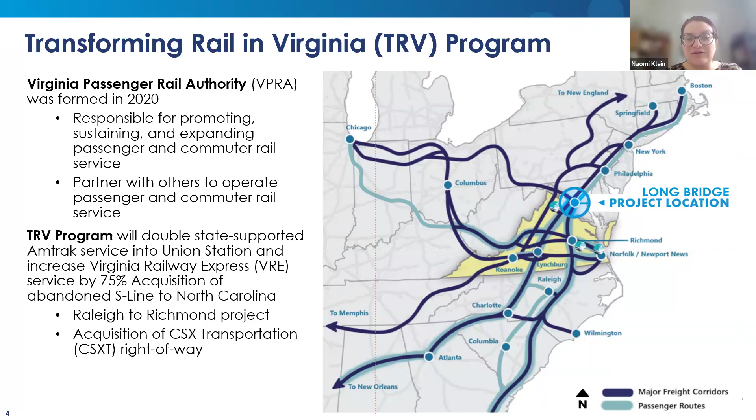As you can see in DC, it really is this midpoint that connects the north with the south, the East Coast with central cities, like you can see here, Chicago. And so it's not just about DC to Richmond, it really is about bridging the East Coast and being able to expand that rail. The TRV program will allow us to double state-supported Amtrak service and also run VRE trains on nights and weekends. So we can go to the next slide.

So this shows you the Long Bridge project. It starts from Arlington, Virginia, over by the Long Bridge Aquatic Center. It goes over the Potomac River through East Potomac Park, across the Washington Channel, through the Maryland Avenue overbuild, and then ends just south of L'Enfant.

There, you're going to hear today, we connect to two other projects. South of us, we connect to the Alexandria Fourth Track project, which you will hear from today. And then north of us, we connect to the L'Enfant project, which is doing a station upgrade and then also building a fourth track to Union Station.

So what we will end up with are 4 tracks from Alexandria all the way up to Union Station, and then 4 tracks that already exist from Union Station up through the Northeast corridor. So you can see the Long Bridge project is split between 2 packages, the South package and the North package. Today, our focus being in a community advisory group for Arlington and Alexandria will be on the South package.

The North package is essentially entirely in the district. And so the South package is constructing the rail bridge across the Potomac River. And then as mitigation for the rail project, the Long Bridge project is also building a dedicated bicycle pedestrian bridge across the Potomac River. So the South package is responsible really for those 2 bridges, bridging over the GWMP and the Mount Vernon Trail, and then working with the North package to build the abutment in Ohio Drive.

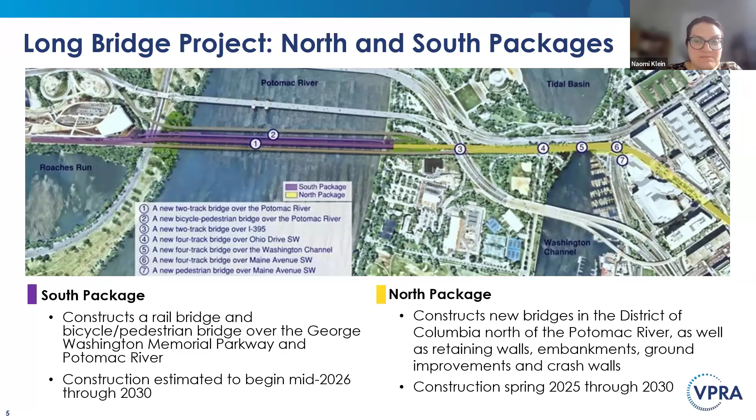So this just shows you a little bit of our activity in DC. While the focus of this meeting today is on Arlington and Alexandria, we know that people are traveling into and through the district, so some of the work we're doing on the North package may affect your travel by car or by train.

We are doing crash wall work on the Maryland Avenue Circle, just north of that picture on top. You can see it a little bit in those buildings to the right. We're doing ongoing utility relocation work to get utilities out of the way to build these bridges, and then additional crash wall and support wall construction.

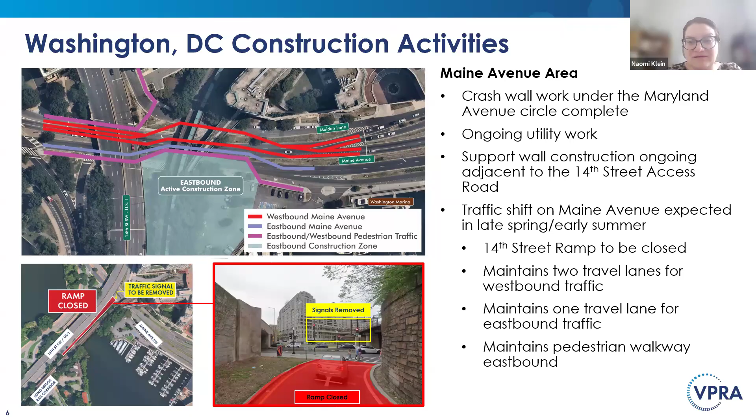There is expected to be a traffic shift on Maine Avenue, either late in spring, in the next couple of months, or in early summer. You're seeing that traffic shift on the top picture, with 1 lane of travel eastbound and 2 lanes westbound. There will be a maintained pedestrian walkway eastbound, and the closure of the ramp that goes from 14th Street to Maine Avenue. That ramp is going to be closed. We're working with DDOT right now on how long that closure will be, but it will be more than several months at least. So we can go to the next slide.

Okay, now we're talking about the Washington Channel, specifically East Potomac Park, closest to the channel, the north side of East Potomac Park. They are currently constructing a trestle, so you may see them building this wooden bridge, or actually almost complete with that construction. That trestle is going to allow them to roll on the heavy machinery needed to build the rail bridge across the Washington Channel.

In East Potomac Park, on the north side closest to the Washington Channel, there is a new traffic pattern going on through spring of 2027, with 1 lane open in each direction rather than the 2 in the typical pattern. Additionally, on the south side of East Potomac Park, closer to the Potomac River, parking lots B and C will be closed for the duration of the project through 2030 to allow for staging of material and equipment needed to build the project. Go to the next slide.

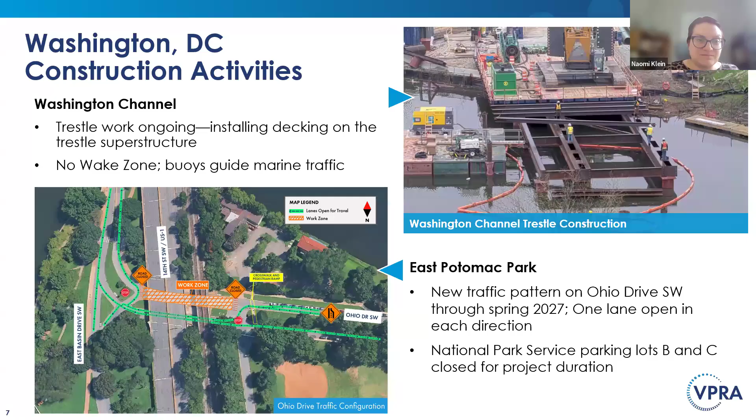Okay, am I talking about this, or am I turning this over to Bryon? I'm sorry, I think I'll take it from here.

Thanks, Bryon. So over the last couple of months, as Naomi said, you've seen a lot of cranes going up, and we've really been focusing on our access, both from GWMP and from the Ohio Drive side, to make sure we can get our cranes on and off the water to support our test pile operations. We've built access roads in from the Gravelly Point parking area, as well as from GWMP between the existing Yellow Line Bridge and existing Long Bridge.

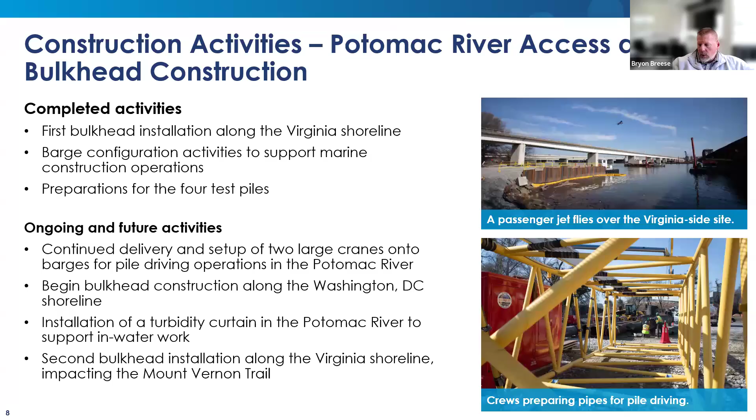Looking forward a little bit, we're going to continue setting up our large cranes for pile driving here. That'll start in a few months. We have a second bulkhead to build on the Virginia shoreline further downstream from the one we built towards Gravelly Point. We've already started building our first of two access points on the DC side of things, so one of our water-based cranes is out there building another bulkhead off of Ohio Drive between the bridges currently. Next slide, please.

Right now that interfaces with Mount Vernon Trail as we go up through there. Our plan is to detour Mount Vernon Trail out to GWMP, and that should happen in the next 4 weeks. We're currently scheduled for May 22nd, the Friday before Memorial Day weekend, to make that transition. That eliminates some of the major interfaces we have with trail users out there. So that's a focus right now coming in from Gravelly Point, getting that trail as far away from our construction area as possible.

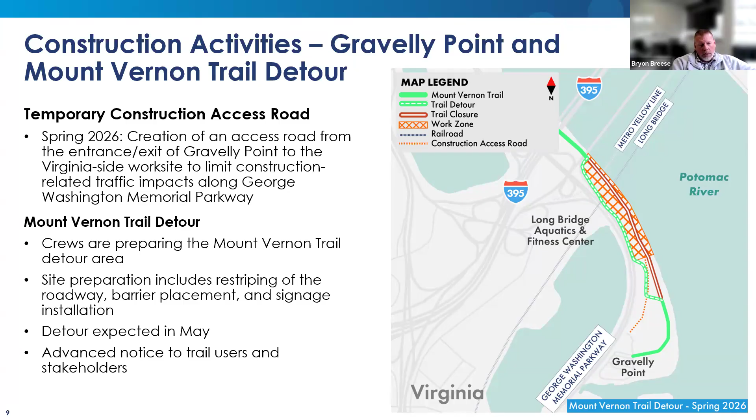Again, a lot of our activities in terms of access have been focused on our test piles. We have 4 test piles to build for this job as part of our scope validation, where we go out there and confirm some of the assumptions we made in our preliminary design. So we have 2 test piles on the water and 2 test piles on land. Currently, the 2 test piles on the water have been driven, and we've had a restrike on them. Now we have to do a statnamic load test.

What that is, you mount a frame on top of those piles out on the water, and you use an explosive charge to inject a force into that pile as you're monitoring the stresses of the pile, and it basically gives you an indication of the capacity of that pile. So again, confirming our design assumptions.

We do have 2 more to build on land. We have one on the DC side of things at East Potomac Park at abutment B, and we have one on the GWMP side of things between GWMP and the shoreline. Those statnamic load tests and the test pile operation itself will take place here in May and June. Next slide, please.

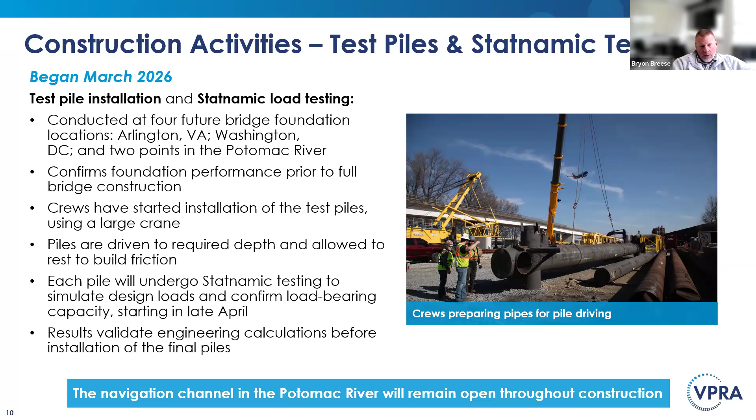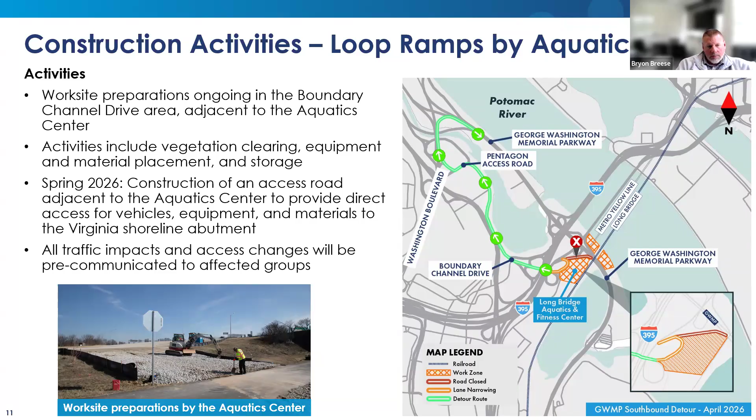Again, the trees have been cleared. We've been developing our access, basically getting our yards and the loop ramp done, and we'll be developing the access along the ramp here in the coming weeks. Next slide, please.

I know we talked about this in the last meeting, but we're getting close to putting our aids to navigation plan into effect out on the water. If you're looking at the graphic, on the lower right-hand corner you'll see basically where we have our construction zones hashed in that orange color, and we'll have a navigational channel going through our work zone where boaters can safely navigate the work zone.

We're going to have a lot of barges and boats running around out there, so we want to make sure we're separating the boating public from our work zone to the extent we can. So this will be installed here over the next few weeks, and it'll be maintained for the life of the job. That channel may shift back and forth a little bit, but it'll generally keep the same concept as what you're seeing in that graphic.

The appropriate aids to navigation and public notifications will be made to all the appropriate marinas and the Coast Guard and everything else, so the notifications should be available to the boating public. Next slide, please. I think that's it for me, Meredith.

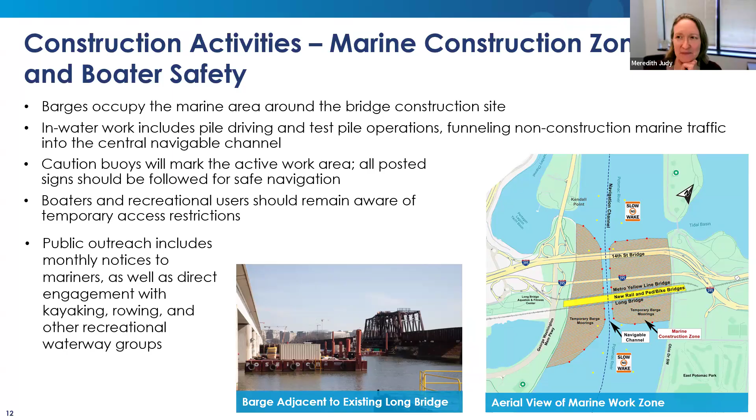Moving further south, we'll get into the Alexandria corridor. I like to call it the Alexandria corridor, not just the Fourth Track project, because it really is a package of projects that the Fourth Track project enables, including the Crystal City Station improvements by VRE, the King Street area projects by VRE that they'll present following me, and the Telegraph Tunnel replacement we'll talk about later this year as we get closer to the tunnel closure.

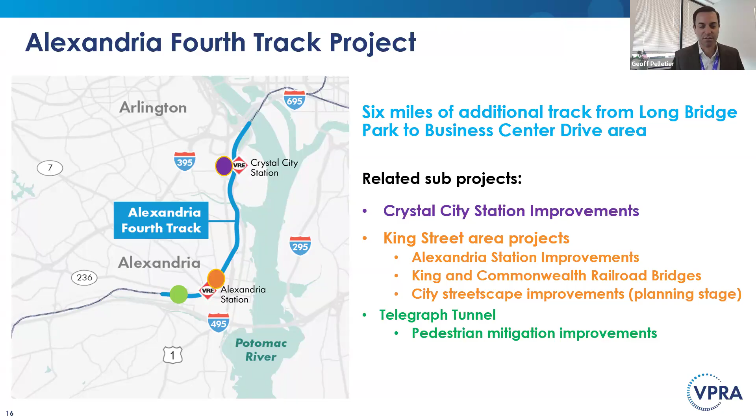But to talk about the Fourth Track project specifically, it picks up where Long Bridge leaves off. It's going to extend the Fourth Track corridor, as Naomi mentioned, about 6 miles south of Long Bridge down to about a mile past Alexandria Station. This is a really critical bottleneck in the area, and it's going to open up service because just south of the station is where trains heading north or south to Richmond branch off from trains moving west out to Roanoke, Charlottesville, Lynchburg, and points that direction.

So we have a lot of trains that come together, not just from our intercity service, but also from the VRE Manassas line and the Fredericksburg line at that point. Having a fourth track in the Alexandria and Arlington corridor is really important to us, and it's something we've been working on for quite some time. We actually kicked off construction late last year, but really have kicked into gear earlier this year. We'll give a few more details in the next couple of slides.

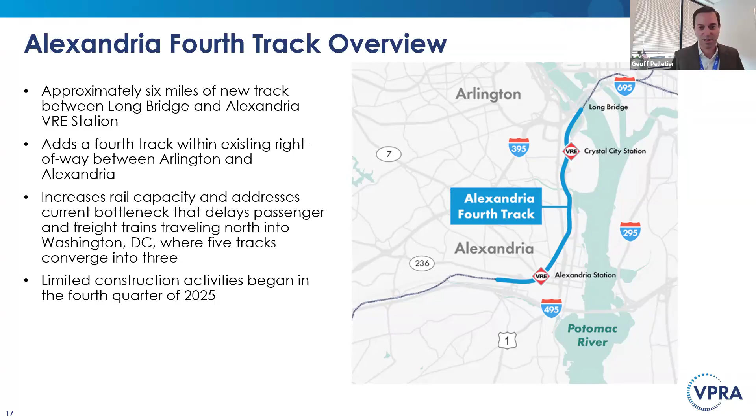To do that, we have to do this very specific and specialty track work that gets fabricated offsite, brought in on rails, and then installed here in the coming months. If you can see some of these panels, they've been laid right adjacent to the trail along the Long Bridge Aquatic Center Park, where you can get a front row seat to see what's been going on there.

We're doing a lot of grading work, and erosion and sediment controls to be compliant with the Virginia DEQ, getting ready to put in some of this new specialty track work that will allow for switching movements during construction, but also allow for four-track operation once Long Bridge comes into service in 2030.

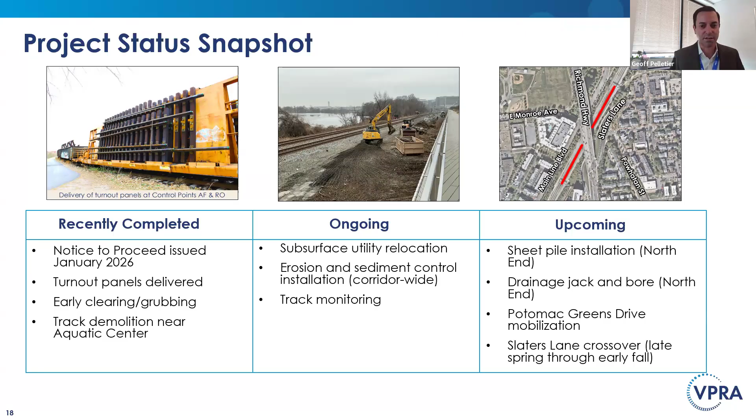In terms of upcoming work, I'll get into it in the next couple slides, but we are working pretty heavily up north, and also some areas along what we call Slaters Lane, or the control point at Slaters Lane, which is where we also have a number of switches and signals. This is right where US 1 goes over the railroad, and that's an area we'll be focusing on in the coming months.

We have a lot of access points within the corridor for the fourth track. Fortunately, the vast majority of the work we're doing can be done within the existing railroad corridor, but we do need to access it. We have 7 locations, but the top 3 are the ones we're using right now.

In Crystal City, we're using the location at Crystal Drive and 12th Street. That is the access point that is gated and monitored 24 hours a day. We have a camera there. It's an access point we know is very sensitive and something that's being monitored very closely by CSX.

We've also started opening up Crystal Drive and Service Road, which gets us to the eastern side of the tracks via the tunnel from the Service Road. And we've recently started work at Potomac Greens Drive and Service Drive in Alexandria to get to that side of the corridor as well.

Then we have these other access points that you see here that we've not yet activated. You will see these at various times. We plan to be using them all at various times, but we've set them up to try to be as little disruption as possible to the neighborhoods and communities that are there.

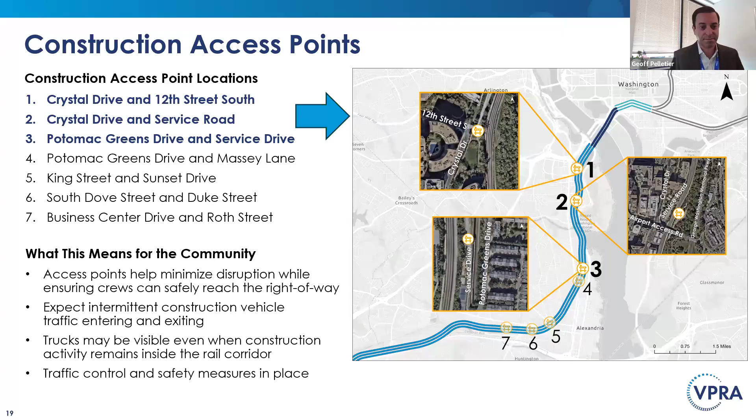As I mentioned before, we have a lot of work going on adjacent to the Long Bridge Aquatic Center. This is an interlocking that we call RO. As I said, there's a lot of signal and switching activity that happens in this area, and we need to get that online in order to do some of the work we're going to do later on in the project. What you'll see is heavy equipment, grading equipment, and possibly some pile driving in the near future.

And then rail construction equipment as well. Some of this work will happen at various times of day, sometimes at night. We've been putting out notifications of when this work is going to happen, but it is the linchpin to the work we're doing in Alexandria. We're going to see a lot of that done and completed this spring and in the upcoming quarter.

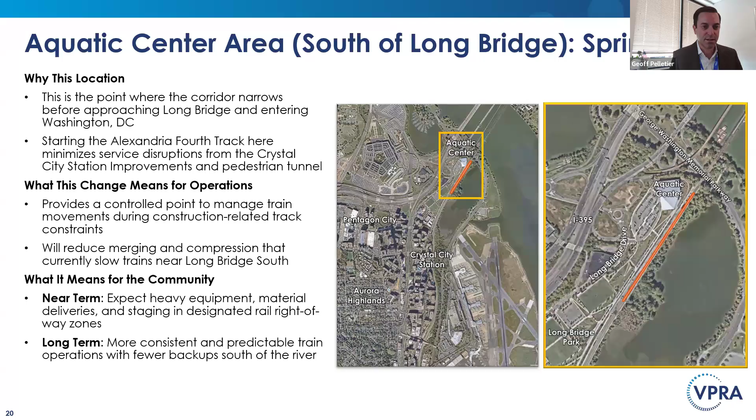Then the Slaters Lane area - this is where we're just getting started. We should be doing some of the grading work, environmental work, and drainage needed for the track work in this area. Similar to the area by the Aquatic Center, we'll be putting in new tracks, welding that track, getting it surfaced, and putting in the stone, the ballast, for the track work itself. So there will be a lot of work happening in this area, and we'll be reaching out as we get closer to making that happen.

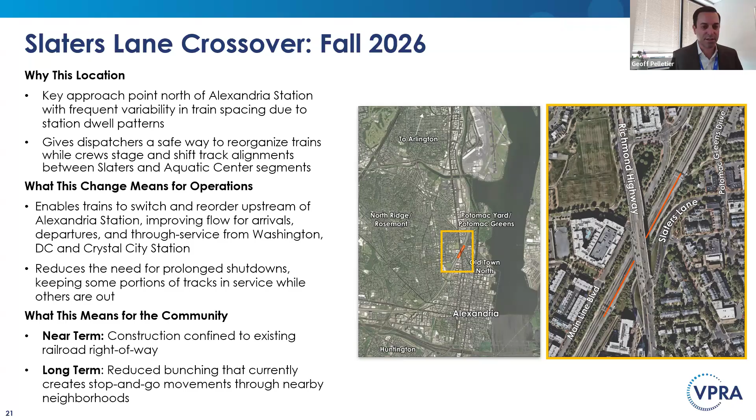But right now, a lot of the work we're doing is around access, and staging equipment and materials in this area.

So the phasing for the next few months is what you see here. I know this is a little tough to see in some areas, but where we're going to be working heavily is up by Long Bridge Aquatic Center and in Slaters Lane. That's the phasing we're doing for the near term.

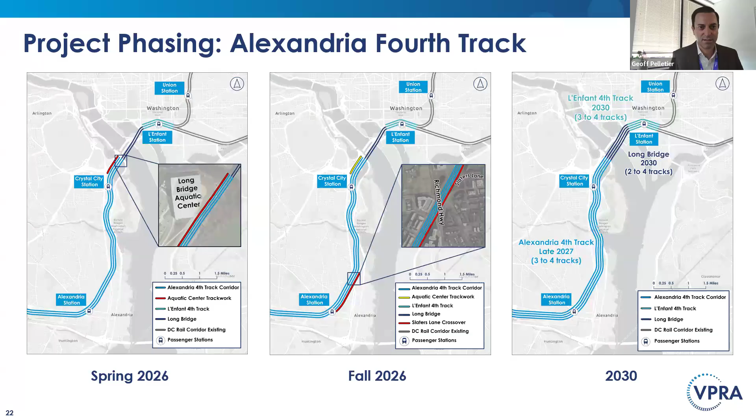This is the timeline we're working on right now. We've completed all of our design work, our right-of-way acquisition, and now we're fully into construction, which we should be wrapping up in late 2027, early 2028. That opens up a lot of the other work for things like Crystal City Station, as well as King and Commonwealth, which Jason Bortz and Jason Scofi will be briefing just after me.

I did see a comment came in while I was presenting. It looks like there was an issue with the Crystal Drive 12th Street access point today.

Yes, this happens periodically. I think the contractors don't want to bother getting out of their vehicle and closing it, so it stays wide open, and we have a lot of curious people here who keep going out on the track. Really? Okay, we will certainly look into that.

I know it's meant to trip close, but I know we have some of the team here from the CSX team that can also look into it as well. Like I said, we do monitor it by camera. We do have folks out there as often as we can, but if there are some times we're missing it, we'll certainly make sure that gets addressed.

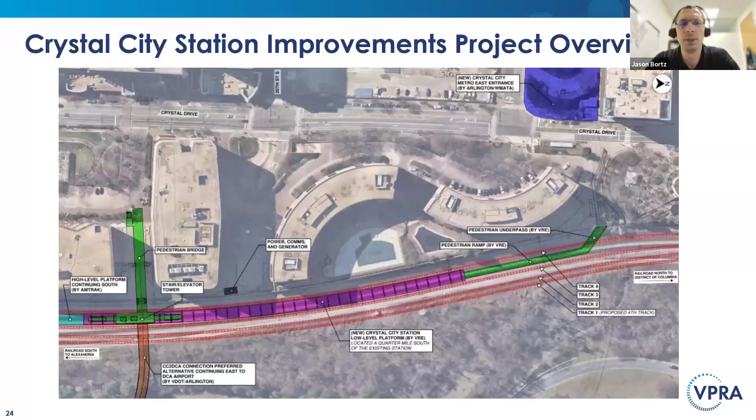So why build all this? The existing station is one of the busiest in our system, and it currently has about a 400-foot platform, which limits the number of doors we can open. We can only open about 5 doors. We generally run up to 8-car train sets. Right now, we're running about 6, but we do commonly run up to 8. So we want to make sure we can open all the doors on the train.

That ensures everybody gets on and off the train more quickly. You don't have people in, let's say, car 1 walking back to car 3 just to get to an open door.

This will also provide 2 boarding edges. Currently, there's only 1 boarding edge, so that means we can be boarding 2 trains simultaneously. We'll also be providing enhanced intermodal transit connectivity, by having the entrances closer to WMATA, the Mount Vernon Trail Connector, and ultimately the pedestrian bridge to the airport, as well as working with bike share and things like that to make sure there are terminals as close to the station as possible.

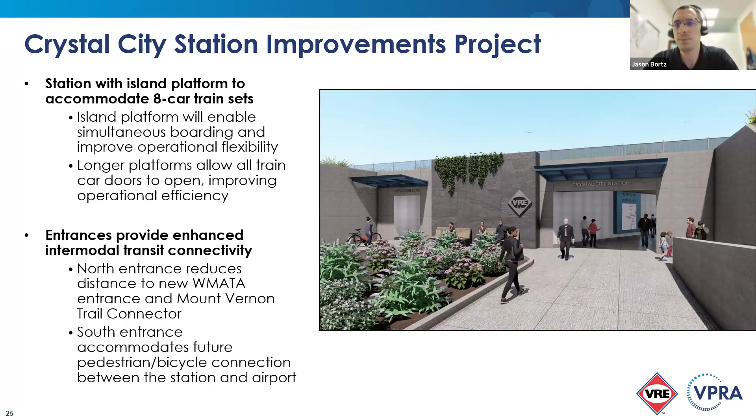So where are we at? Right now, we are wrapping up design. We'll have that final package by the end of the month, which we'll distribute to make sure we've taken care of everything, and be looking to do the formal distribution for invitation for bids probably sometime this summer. Overall, we're closely tracking the 4th track's construction progress to determine exactly when this will go on the street for construction, but we are looking at somewhere in the Q1, Q2 2027 timeframe.

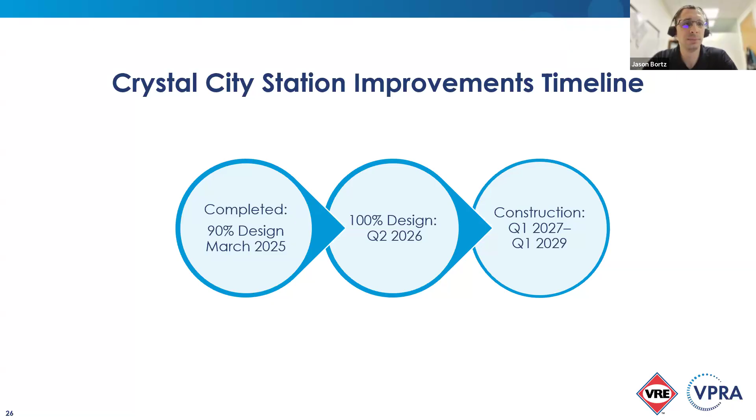Thank you, Jason. I'm Jason Scofi with the construction management team for the project. Many of you have seen this graphic before. As mentioned, it's historically been 2 different projects that we combined together: VPRA's bridge project and VRE's station improvement project. So having just one contractor able to knock out both projects makes things more efficient and streamlined.

Starting from right to left, you'll see the Commonwealth rail bridges and then the King Street bridges in green that'll be replaced. The other goal of the project is to remove the at-grade pedestrian crossing at the station, which will be replaced by installing the 2 elevators shown in magenta, and also replacing the existing pedestrian tunnel to make it a little wider, as well as some platform improvements that I'll get into in the next slide.

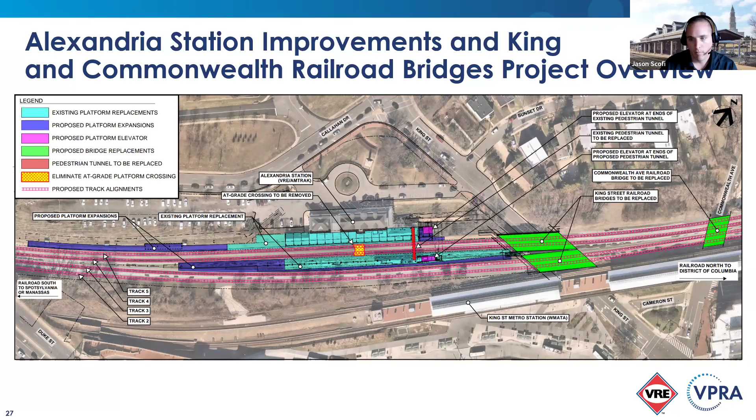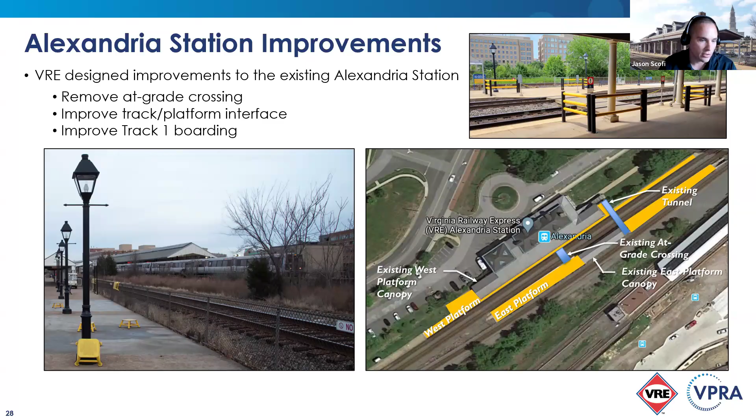At the station here, you'll see the yellow portions. That's where we're going to be extending the platforms, as well as raising them to be 8 inches above top of rail, like the rest of the stations in the VRE system, as Jason mentioned previously. You can see where that existing grade crossing was, and that'll go away. The elevators will be adjacent to the existing tunnel. We're also adding a boarding edge along track 1 where there isn't one today, so you'll have 3 boarding edges on tracks 1, 2, and 3.

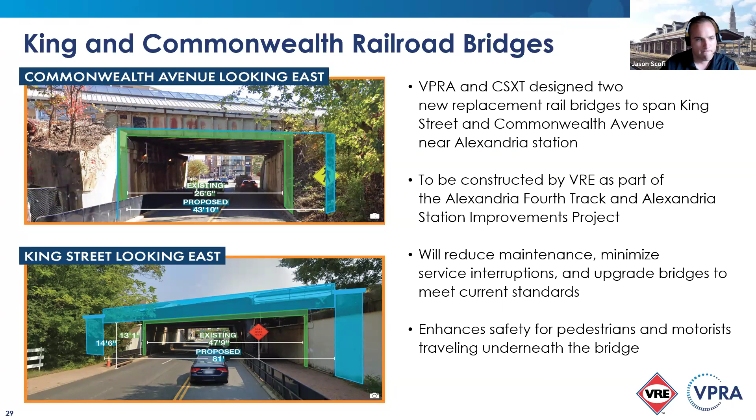Here's a high level 2026 construction timeline. The contractor began to mobilize on site in January of this year. Right now we're in Q2, working on jump spans and support of excavation, which I'll get into in the next slide. Later this year and into the summer, they'll be doing the micropiles and bridge footings for the bridge itself. Then in Q4 of this year, we'll be moving to building the bridge foundation walls that hold up the bridge.

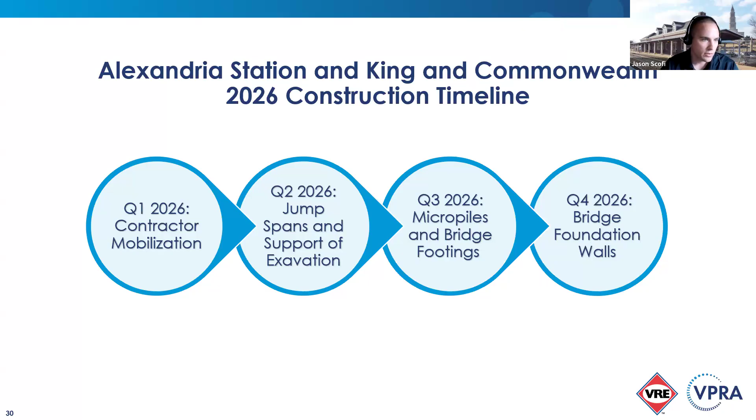Digging into some of the details here. When the contractor mobilized on site, you'll see the orange construction trailers - that's where the construction crews have their field offices located. You'll notice the three big cranes out there, the two big red cranes and the one big yellow crane. Those will be here for the project. You'll see them move from this side of the tracks to the other side, and then back to the west side, just due to the sequencing of the work.

They completed surveying and utility location, and right now they've started some of the sheet pile work for support of excavation, mostly up by Commonwealth Avenue, and just starting on the King Street one earlier this week. They're also doing center platform work - building a temporary platform to access track one and board people off of that track. That's underway right now, you'll see the crews out there. Upcoming, I'll note that the picture on the top right is not from our project.

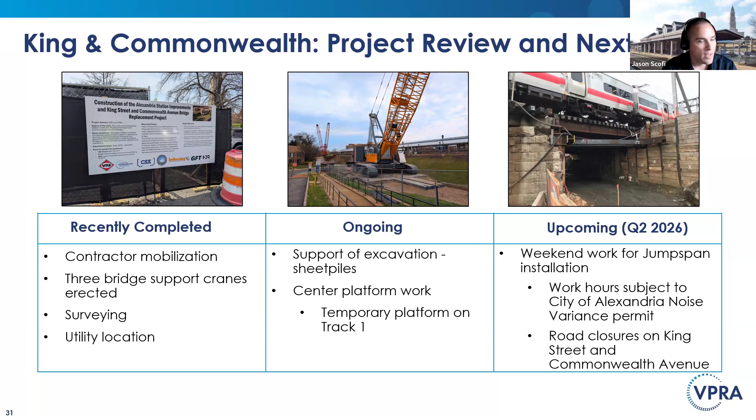It's an example of what the jump spans will look like on the project. In May, we've got 3 weekends of work to install these temporary jump spans, which allow us to then go and build the permanent bridge footers and foundations underneath the track. That work is subject to the City of Alexandria noise variance permit, and will include road closures on King Street and Commonwealth Avenue. There's been a lot of questions on that, so let's talk about it.

What everyone's looking for here - let me jump to the middle first, of when this work is going to occur. It begins Friday night, May 1. More in the evening, like 7, 8 p.m., you'll start to see some movement around the site, with service restored for Tuesday morning rail traffic on May 5th. The second and third weekends, May 15th and May 29th, will begin Friday mornings, both of those, and restore that same Tuesday morning. The work for those is a little more in depth and requires a little more time to complete, which is why it's a little longer.

The road closures involved here: King Street will be closed in both directions, so there'll be no traffic going under the King Street Bridge. Everyone will detour over to Duke Street. Commonwealth Avenue will have 1 lane open and 1 lane closed, and we'll be flagging vehicles in both directions using just the 1 lane on Commonwealth Avenue. The noise variance permit granted allows us to work from 7 a.m. to 11 p.m. daily.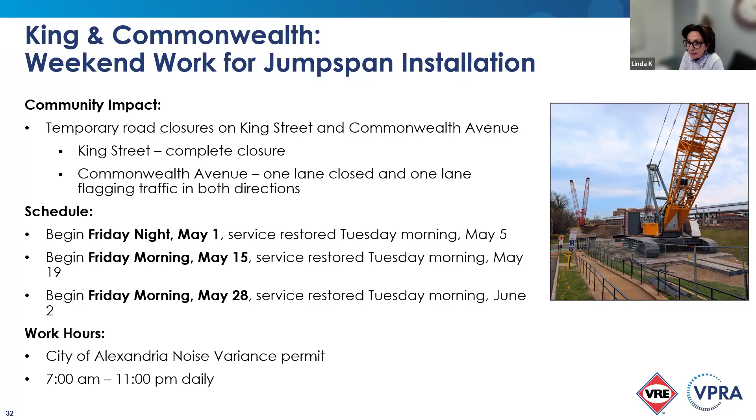Steve Mass, I believe you have your hand up. Yes, the changes involving Amtrak, is that going to have anything to do with their plans to have a Crystal City stop? Is it just a matter of whether they're going to stop on a new ramp or a new platform or the existing one? Is that the only thing at issue?

I'd say that's the primary issue. Ultimately, it's not particularly feasible for Amtrak to add a Crystal City station stop until the Long Bridge project is completed, so post 2030, 2031, something like that. But what we're endeavoring to do is make sure our platform is fully capable of serving Amtrak. We have multiple stations where Amtrak and VRE are co-located, so from an infrastructure standpoint it's not a whole lot of difference. It's just making sure they have space allocated for things like their baggage cart, since VRE doesn't have baggage service. It's things of that nature, but we'll be making sure all the infrastructure is capable for it. As far as the operations aspect, and when Amtrak decides to initiate that service, that one's a little bit outside my realm. I do apologize for that one.